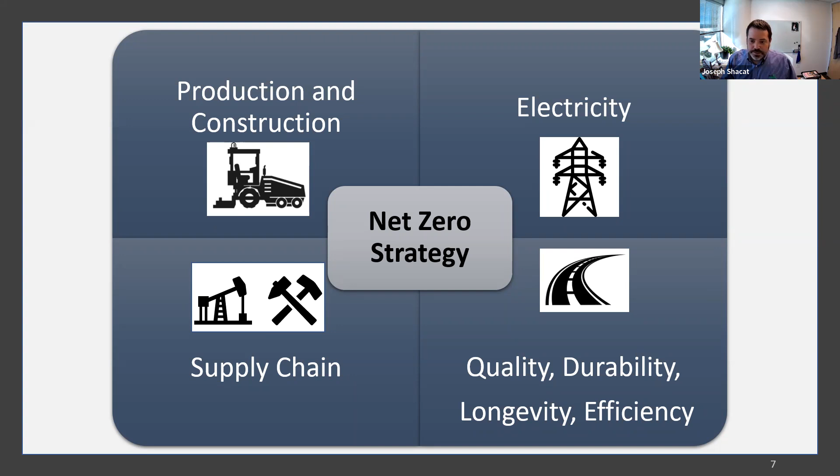Okay, one last thing that I want to mention on this big picture. One of the programs we're working on with federal agencies to help move the industry forward: we've been working with the US EPA's Energy Star program for the last several years. We're an Energy Star partner at NAPA. And we put together this energy performance peer exchange group for asphalt plants called APEX.

So this is an opportunity for you, your company, to work with EPA's Energy Star program. This is for their industrial plants program, similar to but different from the Energy Star certifications on appliances that you see at the, I would say Sears, but Sears doesn't really exist anymore, but at the department store when you're buying appliances.

So through this program, you can partner with EPA, you can promote your company's partnership and market on it, you can learn about energy management, obviously, and you have access to one of their industrial energy advisors to help you develop your company's energy management program. So I really encourage you to take a look at this program. We're happy to bring on new folks in this program.

Okay, so let's now, 15 minutes in, jump into the subject matter that we're here to talk about, and that's EPDs. So starting with EPDs, there's a term that I want to familiarize everyone with, and that is embodied carbon. And this is a term you might be familiar with because it's getting more and more use in the popular media, and you might have seen this around. But when you talk about greenhouse gas emissions, embodied carbon is all the emissions associated with manufacturing, transporting, and installing, and even maintaining your buildings and your infrastructure.

So look around you, you're sitting in a room with carpet, probably with painted walls and windows and lighting fixtures and a concrete or steel structure. So it's all the emissions associated with manufacturing all those products in the building. And in a roadway, it would be similar. It's all the emissions associated with manufacturing and constructing the pavement, the base, curb and gutter, striping, all that sort of thing. And then the operational carbon is the carbon needed to actually operate that asset. So in your building, it's your lighting, your heating, ventilation, air conditioning, and in the roadway it's going to be the vehicle fuel consumption. So those are these two key things.

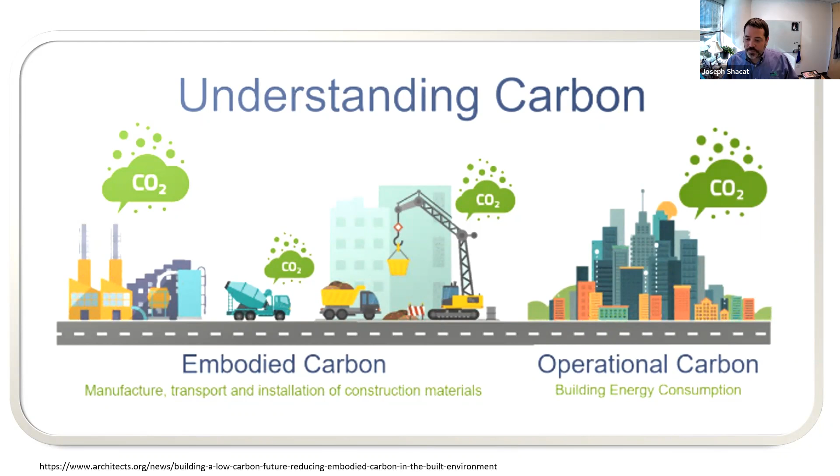When we talk about EPDs, we're talking about the embodied carbon, right? It's generally difficult to quantify, but we have a way to quantify it with EPDs. And that's the whole point of this program. So what is an EPD? Environmental Product Declaration. It's often given an analogy as an environmental version of a nutrition label. So instead of giving you facts about the vitamins and the carbohydrates and the saturated fat, it gives you information about the energy and the environmental impacts associated with manufacturing a product.

So EPDs are governed by international standards and product-specific standards called product category rules. It's considered an environmental label by ISO, the International Organization for Standardization. And the purpose of an EPD is to enable comparisons between products that fulfill the same function. So you're quantifying environmental information about this product and then enabling comparisons. Now, when you talk about the same function, one is you have to have the same set of product category rules, and we'll get into that later in this presentation.

But within the context of an asphalt mix, I would say that products that meet the same specification for a mix type, for example, fulfill the same function. If you have different specs, they're different products, right? You wouldn't put a surface mix as a binder course or a base course, right? And you would use a porous asphalt on a porous pavement project and maybe not on a regular highway pavement, right? So to me, the important thing here is that same function refers to specifications around mix types. EPDs are also independently verified, and that's an important component of the program. It provides that veracity, that assurance that everything is meeting all the requirements, that the data is reasonable, and that sort of thing.

So when we talk about EPDs, the important thing to note here is that EPDs have a cradle to gate scope. In this diagram on the right, you see the life cycle of a pavement, starting with materials, referred to as A1, right? So you have the raw material extraction. This is blasting and crushing the rock to get aggregates. For asphalt binder, it's everything from extracting petroleum out of the ground, transporting it to a refinery, refinery operations, transporting the finished binder to a terminal and the terminal operations, right? That's all part of that upstream raw material extraction and processing stage. Then you're going to transport those materials to your asphalt plant. Then you're going to produce those at your plant, the production. And those are the three stages covered by an EPD.

Once you go beyond those stages, they're not covered by an EPD, primarily because the manufacturer or the mix producer doesn't always have a lot of control over where the job site's going to be, who's going to construct it, what their paving operations are going to be, what kind of equipment they're going to use, how that pavement is going to be used, what the traffic loading is going to be on it, how it's going to be maintained over the long term by the agency, and then what's going to happen to it at the end of life.

Those additional life cycle stages can be evaluated by doing a life cycle assessment. And there's software available, a number of software packages out there to do that. The one that's gaining a lot of traction right now was developed by the Federal Highway Administration, called LCA Pave. And what's interesting about LCA Pave is it's designed to allow you to take an EPD for the cradle-to-gate stages and use that as a data source to plug into a full life cycle assessment to look at the additional life cycle stages.

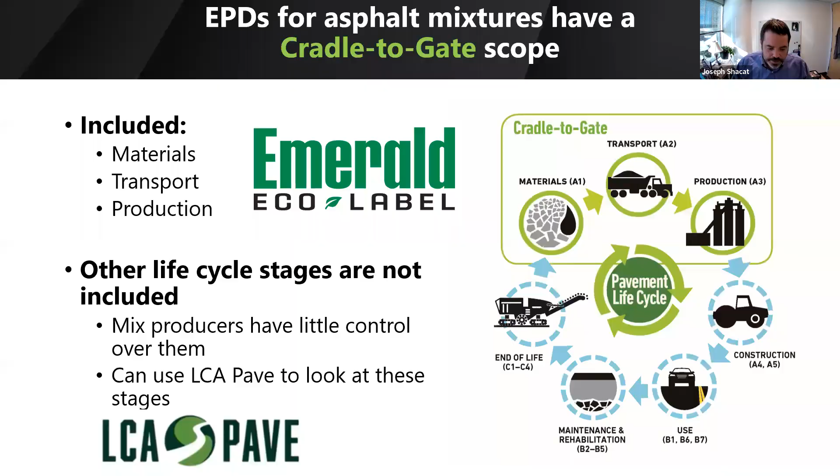So that's the basic introduction of what EPDs are and how they fit into the full life cycle of a pavement, and then looking at life cycle assessment in general. So let's now dive into the meat of this presentation, which is what's going on at the policy level. I need to take a moment here to center myself because there's a lot going on, and this presentation, literally, I can update it almost every week because there's so much going on. I had a presentation about 2 weeks ago similar to this, and since then I've added a couple of slides for new things that have come out just in the past week or so.

So when we talk about policy level and EPDs and embodied carbon, you've got to start with Buy Clean legislation. And this was kicked off initially in the state of California, probably not much of a surprise to folks here, when they issued their Buy Clean California Act back in 2017. Now that act does not apply to asphalt, or concrete for that matter. It does apply to steel and flat glass and glass wool insulation. But what it does is it requires contractors who supply those materials to the state of California for state-funded projects

to, one, provide an EPD, and then two, for each of those materials, the agency establishes a maximum GWP limit. GWP is the global warming potential or the carbon footprint of your product. So there's a maximum limit. So your product has to be under that maximum limit to qualify to be used on a project in the state of California. So this is like a pre-qualification requirement. So that was the California approach.

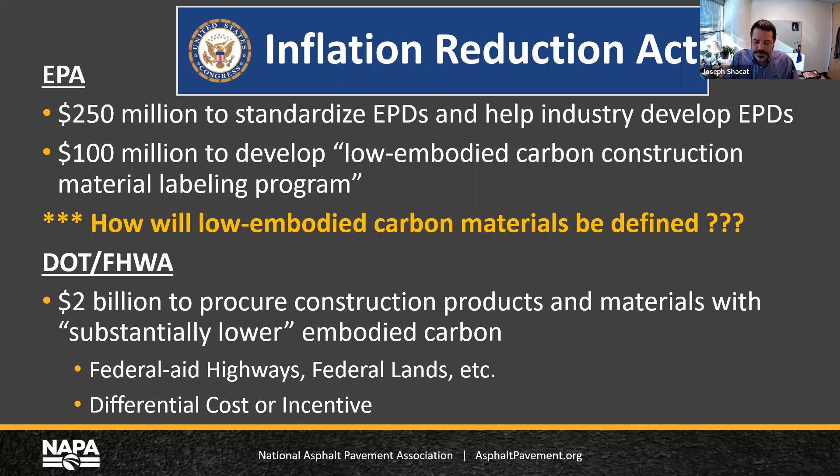This is kind of a sea change from the low bid environment that we've lived in with federally funded projects for the last decades and decades. So pretty significant. So how is this going to be defined? We've been asking this question since this bill passed in August. Just this past week, we got a little bit more clarity because the EPA issued an initial determination of what defines a substantially lower embodied carbon. So this is an interim. So we expect this guidance to change, and they clearly state this will develop over time.

But currently, the best performing 20% of similar materials and products. Remember, we talked about that at the beginning. How do you compare EPDs? What's comparable? It's based on specifications, right? So this would be defined at the agency level. And we're not exactly sure how it's going to play out in the policy space. But for example, South Carolina DOT or Hawaii DOT would say, hey, we have 5, 10 different mix types. They would assign thresholds for each of them.

So you'd have the top 20% performing materials, or the lowest GWPs. And if that's not locally available, then you'd go to the top 40% of performing materials. And if that's not available locally, then you go to better than the estimated industry average, right? So the agencies will be developing these thresholds based on published EPDs. So if you want to have a say in how these thresholds are defined, the most important thing you could be doing now is thinking about, how do I get my plants to publish EPDs on these kinds of products so that we can be included in the definitions of what the best performing products are.

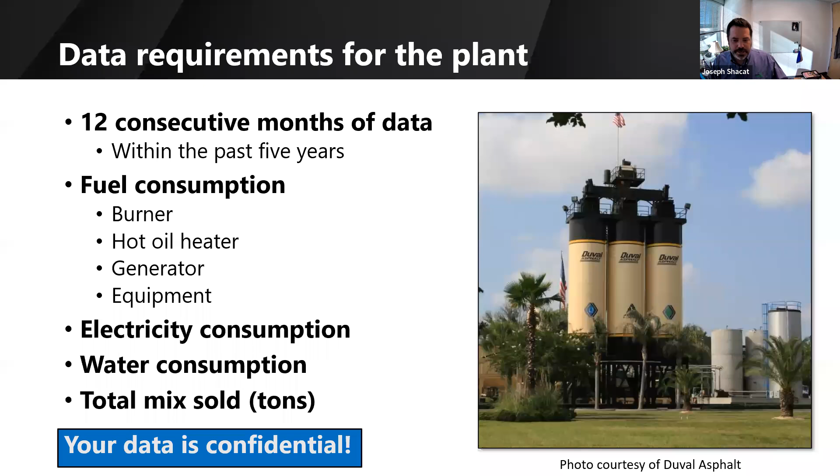Now, for the mixes, we're going to look at things like your mix design, right? What's the percentage by weight of your aggregates, your virgin asphalt binder, your RAP, or if you're using recycled shingles, any additives that you're putting in the mix, or any other ingredients that are going in there, right? And then for those materials, how did they get to your plant? They come by truck, they come by rail, maybe by barge, ocean going vessel.

And then we ask for your mix production temperature. I'm going to say right from the beginning here, currently we don't have a way to change your EPD results based on actual mix production temperature, but we are passing that information through, disclosing it to the EPD user or reader, so that there's transparency.

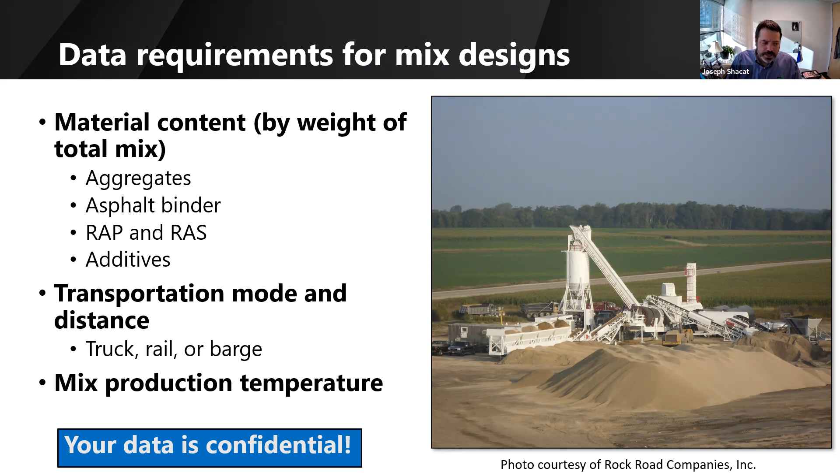You can say, oh, this mix was produced at 270 degrees or 300 degrees or 340 degrees. And it's a way to at least communicate to the customer that maybe you're using a warm mix, or maybe this is really a little bit hotter than normal because it's polymer modified. But it does convey at least some information about that.

So, we talked about the mix design requirements. So we have good data for your specific plant on your plant's operational energy. But what about the impacts associated with manufacturing your raw materials, like your asphalt binder and your aggregates? And so we rely on a federal database for most of this information called the Federal LCA Commons.

And this is a group of federal agencies that have an LCA compendium of data from agencies as well as from industry. So it's all transparent, it's publicly available, it's free. So we pull that data into our software and we use that. Now, the advantages of this one, it's federally backed to some extent. It's transparent, and it's of course free, so it keeps the cost down, as opposed to purchasing upstream data from proprietary data sets that are more like a black box.

So one of the disadvantages is there's a lot of incomplete information about some materials in asphalt mixtures, in particular additives, things like your warm mix additives and rejuvenators and fibers, and other similar products. Some of your proprietary rubber modified binder products. So if you have a data gap in your mix design, that's going to be disclosed on the EPD.

This is an example of the cover page of an EPD. And you see that red box right there on the cover page, that data completeness statement. And that's indicating that this particular mix for this EPD has a material in it with a data gap. And the EPD is still valid, but it's just disclosing to the customer, being transparent to them, that there's something missing here. We're not sure quite how much it is.

But on the subsequent page, which I'm not going to show you today, it'll have a list of ingredients and it'll indicate which one has the data gap. So also with the EPD software, when you get into the tool, we have a function that we added last year called the optimizer. And the optimizer lets you easily compare two of your own mixes to each other. Makes it super easy to look at them side by side.

And it lets you really drill down into not just those A1, A2, and A3 life cycle stages, the materials, transportation, and plant operations, but it looks into specific unit processes, like each specific material, transporting each material, and then unit processes at the plant level, electricity versus burner fuel versus hot oil heater, et cetera.

You can also think of it as a sandbox where you can create variants of your plant. You can run the what if scenarios. Like, what if we could reduce our electricity consumption by 10%? Or what if we change our fuel type from used oil to natural gas? It lets you run those scenarios and understand how that would affect your EPD results.

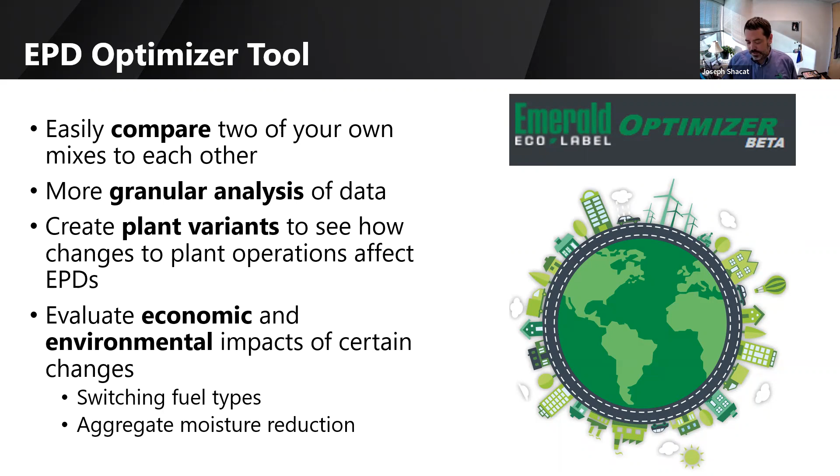This is a quick example of the output of the optimizer tool. This is the same mix produced from the same plant, but two different variants. So the one on the right burns natural gas, and the one on the left burns diesel fuel. And you'll see that big number there, 46.85 versus 38.31.

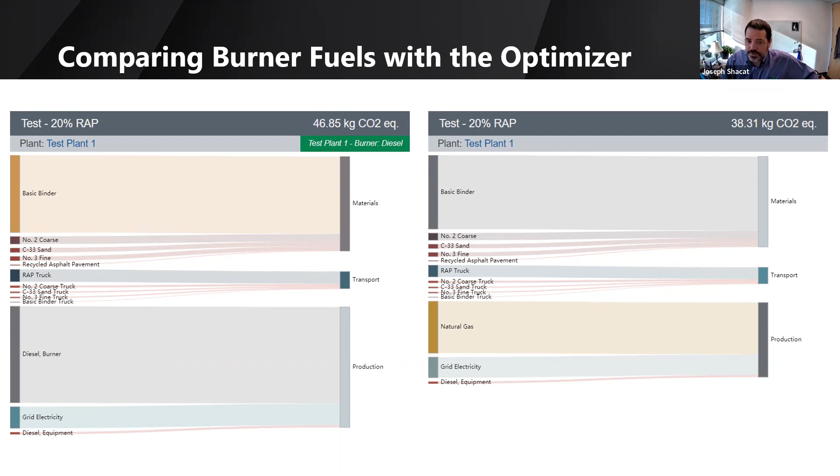This is a significant difference here. Just by switching your burner fuel type from diesel fuel to natural gas, you can have a pretty significant reduction in carbon emissions. So this is what I mean by that granular view of seeing every single thing. This is just one example. You might find very different results for your mixes from your plants.

So let's talk about common questions about EPDs. This is kind of the tail end of the presentation here. And these are the most common things we get about them in general, especially as people are first starting to learn about these. The first one is, how much time does it take and what's it going to cost me to do this? So we're very transparent about our pricing schedule here. There's a significant discount for members, mostly because member dues have really underwritten the cost to develop this program, which has been a very substantial cost over the last 7 years or so.

How much time does it take? Initial data collection, setting up your first plant, first couple of mixes, can be as little as a couple of weeks. Sometimes, if they're not working on it very steadily, it might take a company a few months to pull all the data together. But once you get over that hump with your first plant and your first couple mixes, setting up your suppliers and new mixes most people can do in about 10 or 15 minutes. So it's fairly straightforward once you're kind of in the system and running.

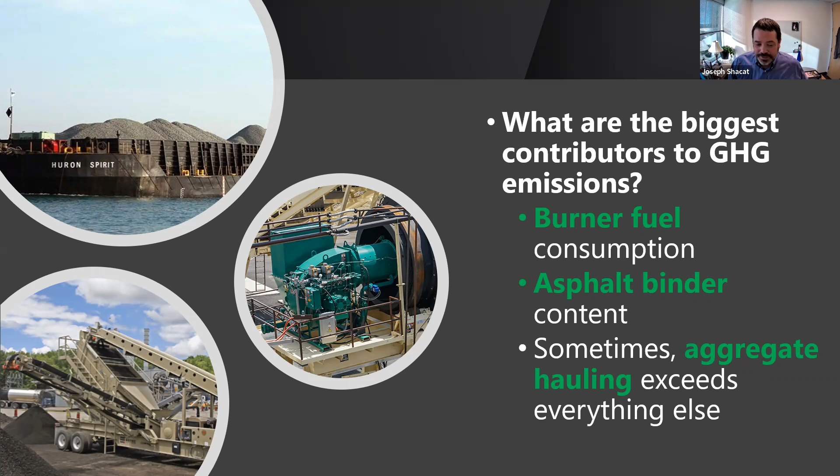That can cause an EPD's global warming potential, or GWP, to increase from, say, 50 to maybe 120 just from that aggregate hauling. So aggregate hauling can be very significant. It's actually a very carbon intensive process relative to all the other aspects of making a mix. What I like to say is that the carbon footprint of an asphalt mix is so low that hauling becomes really important if you're hauling long distances. So that's one way to think of it if you're an optimist.

Next question, can we use EPDs for pavement type selection? This is the constant asphalt versus concrete, which one's lower carbon? Can I use EPDs to support this sort of decision making? The simple answer is no. The complicated answer is no. We could talk about this one for a whole hour, or probably for weeks. But the simple part of it is there are different PCRs for asphalt and concrete products, so they're complying with different rules. So it doesn't make sense to compare them, because they might be using different upstream data sets for things like electricity or energy use, or even raw materials.

And also, the performance expectations are different. So similar to where you wouldn't want to compare, say, a surface mix to a binder course or something like that, you wouldn't compare an asphalt to a concrete pavement because they're going to have different performance characteristics.

Now, if you could harmonize all those upstream kind of data issues, you could plug EPDs into a comparative LCA and look at that. But then there's a lot of challenges and issues with modeling the use stage. There's a whole bunch of models out there, for example, for modeling how pavement smoothness and other pavement properties affect vehicle fuel consumption. But for some of those models, there's really no consensus as to how accurate they are and how reflective of reality they are.

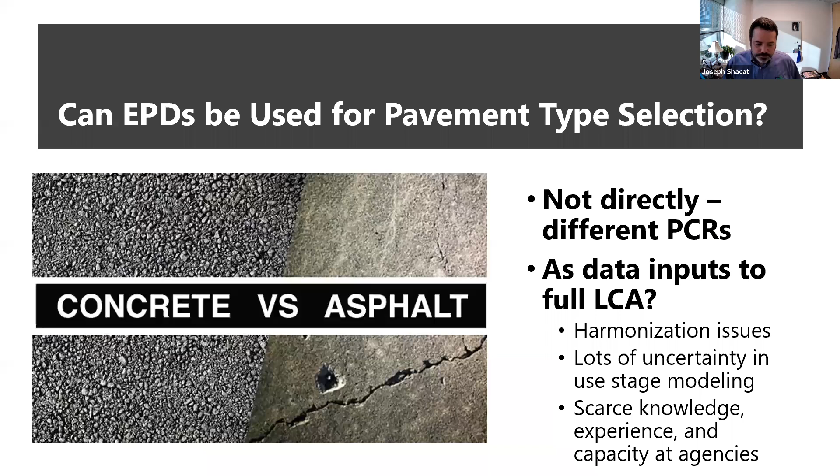The last one is policy considerations, right? I'm not sure what exactly is going to happen in South Carolina. We've seen a lot on what's happening at the federal level, but we talked about how you should be thinking about how each agency spec or mix type is a different product, right? We have a little bit of clarity now on some programs, like through the Inflation Reduction Act, where it's going to be, I think, an incentive based on the 20th and 40th and whatever percentile. So we're starting to get some clarity there, but it's still not entirely clear. And I think there's opportunities for that to change, what those policies are, how they're shaped.

The other thing is to think about regional variations. Things like climate from one part of a state to another. I think about this in terms of a state like Oregon, right? Western Oregon rains all the time. Eastern Oregon is almost a desert, right? So you have probably a lot more aggregate moisture in the western part of the state than in the eastern part of the state. So that's an example of where climate variations can be significant, because that's going to affect your aggregate moisture and then your EPD results.

Aggregate supply. We talked about shipping rock, right? So maybe you're using, say, a friction surface mix, and it requires a high friction aggregate, and all you have is limestone that polishes and doesn't meet the friction requirements. So in a certain part of the state, you're going to be pulling in rock from maybe a few hundred miles away to meet the friction requirements, right? But maybe for another part of the state, it's available locally. So you should be thinking about how that's going to affect you.